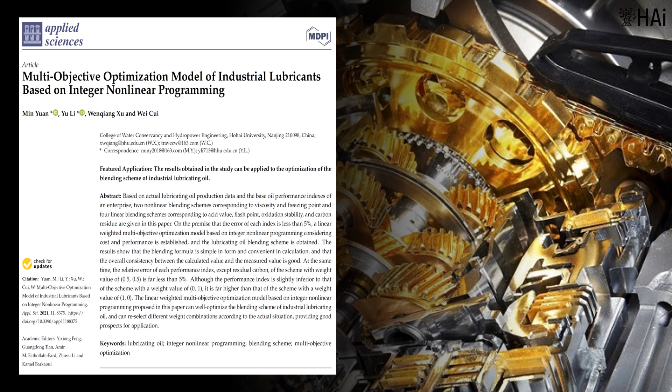Presents the Conference: Oil Lubricant Blend Nonlinear Optimization. The material of the conference was organized by engineer Jesus Velasquez Bermudez, Ph.D. This conference is based on the paper Multi-Objective Optimization Model of Industrial Lubricants based on Integer Nonlinear Programming.

Industrial lubricating oil is a liquid or semi-solid lubricant used in various types of automobiles and mechanical equipment to reduce friction and protect machinery and machined parts. It mainly plays the roles of lubrication, auxiliary cooling, rust prevention, cleaning, sealing, and cushioning.

At present, the demand for lubricating oil shows a trend of specialization and customization. Different mechanical equipment and applications have different requirements for lubricating oil performance, so there is an urgent need for enterprises to produce specific quality lubricating oil according to the actual demand.

Lubricating oil products are prepared by mixing two or more base oils with different properties according to a certain proportion. However, the varieties of base oils refined by oil refining enterprises are limited, so it is necessary to use limited base oils to prepare the required lubricating oils. Therefore, the blending of base oils is the basis for the preparation of lubricating oil products. The most common method of lubricating oil blending is tank blending.

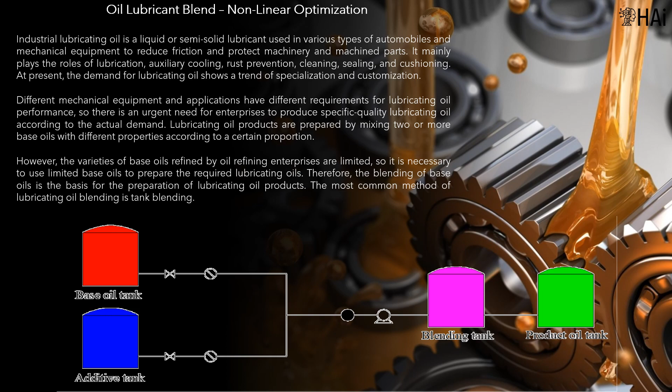The image presents an oil lubricant production plant. The image presents the base oil supply chain. Oil lubricant blend and nonlinear optimization process.

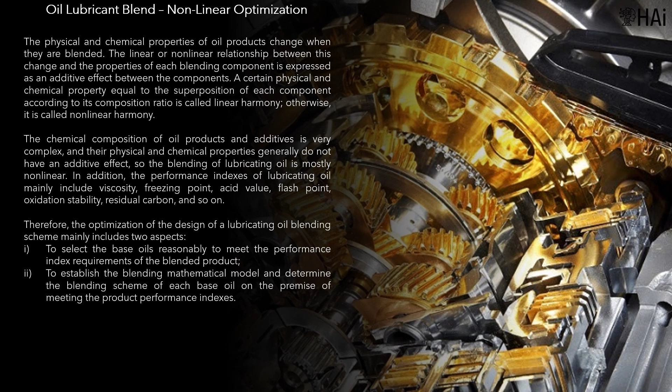The physical and chemical properties of oil products change when they are blended. The linear or nonlinear relationship between this change and the properties of each blending component is expressed as an additive effect between the components. A certain physical and chemical property equal to the superposition of each component according to its composition ratio is called linear harmony, otherwise, it is called nonlinear harmony.

The chemical composition of oil products and additives is very complex, and their physical and chemical properties generally do not have an additive effect, so the blending of lubricating oil is mostly nonlinear.

In addition, the performance indexes of lubricating oil mainly include viscosity, freezing point, acid value, flash point, oxidation stability, residual carbon, and so on. Therefore, the optimization of the design of a lubricating oil blending scheme mainly includes two aspects: to select the base oils reasonably to meet the performance index requirements of the blended product, and to establish the blending mathematical model, and determine the blending scheme of each base oil, on the premise of meeting the product performance indexes.

The blending formula of early lubricating oil was mainly optimized by the linear programming method. However, many important technical indexes of lubricating oil do not show a simple linear relationship with the content of each component. If the oil products are blended according to the linear programming method, the prediction accuracy of the performance of the blended product will be poor, and unable to meet the actual needs of production.

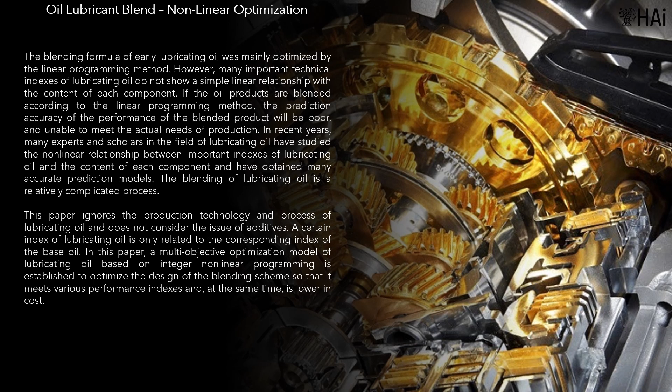In this paper, a multi-objective optimization model of lubricating oil, based on integer nonlinear programming is presented. The proposed modeling process considers two stages: first, data preprocessing, and second, optimization of the blending. The first is based on predictive analytics and the second on prescriptive analytics.

Data preprocessing. To manage nonlinearities and uncertainty in the transformation functions of the mixture of the base oil characteristics and the technical specifications of the lubricant, the following process was followed.

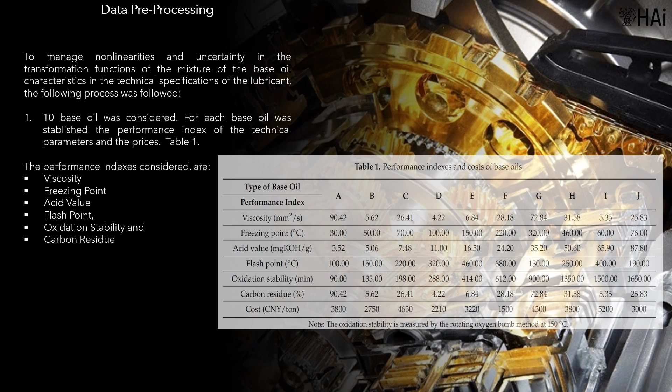10 base oils were considered. The performance indexes considered are viscosity, freezing point, acid value, flash point, oxidation stability, and carbon residue.

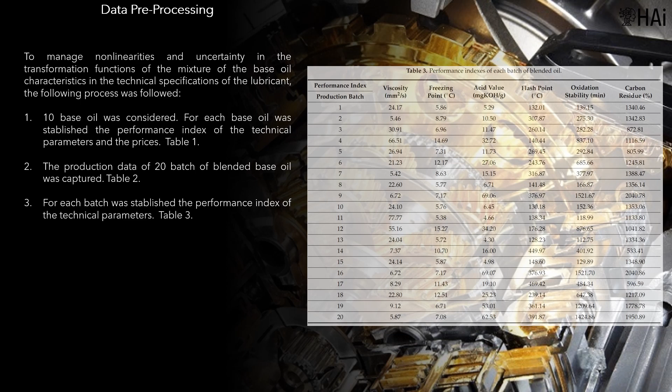The production data of 20 batches of blended base oil was captured. For each batch was established the value of performance index, in the appropriate measurement units. The data was normalized for the 20 batches, to calculate the mass fraction of base oil in each batch of blended oil. The calculation formula is as follows.

The mass fraction matrix of blended oil is equal to the mass of base oil I in batch J of blended oil, divided by the total mass of batch J of blended oil.

The table presents the value of the performance indexes for each of the base oils considered, and unit costs per ton for each base oil.

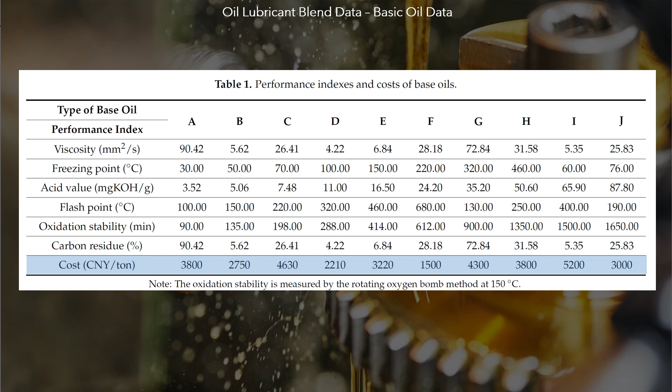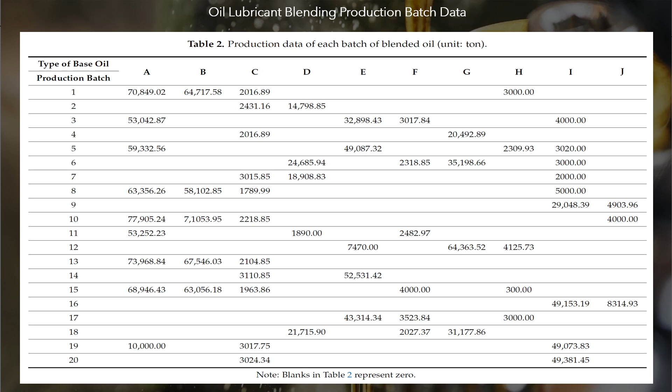The table presents the composition by weight of each base oil in each batch. From this data, the mass fraction matrix is calculated. The table presents the observed index performance for each batch.

All the above data will be used to calibrate the contribution formulas of each base oil in the blend for each performance index. In this paper, the viscosity of each oil batch is calculated using the internationally common viscosity blending calculation formula. For the freezing point, a polynomial formula is proposed. For the other indexes, acid value, flash point, oxidation stability, and carbon residue, the linear blending formula is applied to predict the lubricating oil indexes.

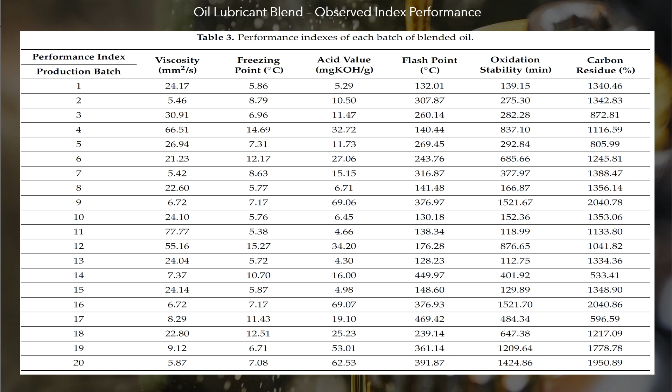The indexes with low prediction accuracy are adjusted non-linearly, and finally the blending scheme uses a complex power polynomial for high-precision prediction. Adjusted data for viscosity.

Viscosity is one of the most important characteristics of lubricating oil and a performance index that should be considered first in lubricating oil blending. In addition, the viscosity of lubricating oil is an important basis for classifying oil brand numbers.

The viscosity calculation formula is established as follows: the logarithm of the observed viscosity is equal to the sum over the base oils of the mass fraction of the oil mixed, multiplied by the logarithm of viscosity of the base oil.

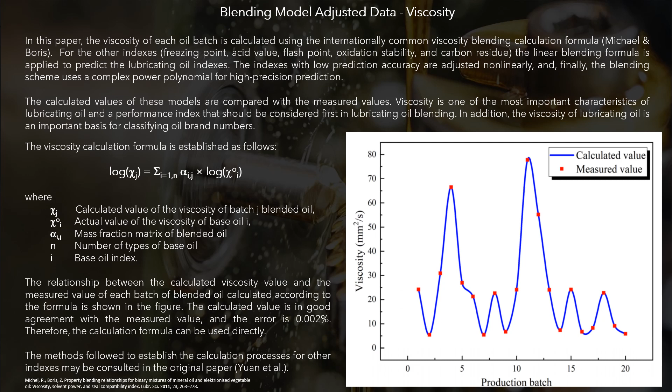The relationship between the calculated viscosity value and the measured value of each batch of blended oil calculated is shown in the figure. The calculated value is in good agreement with the measured value, and the error is 0.002%. Therefore, the calculation formula can be used directly.

Adjusted data for freezing point. The freezing point calculation formula is established as follows.

The calculated freezing point value of batch J of mixed oil is equal to the sum over all base oils of the mass fraction matrix of the mixed oil, multiplied by a polynomial function of the freezing point of the base oil. The polynomial function includes two factors that must be estimated, h and f. It is equal to the freezing point of the base oil raised to the power f, plus h multiplied by the freezing point of the base oil raised to the power 1/3.

Using a nonlinear least squares algorithm, the values of f and h are 0.4754 and minus 0.003, respectively. The calculated value is in good agreement with the measured value, and the average error is 1.546%, so the calculation formula can be used directly.

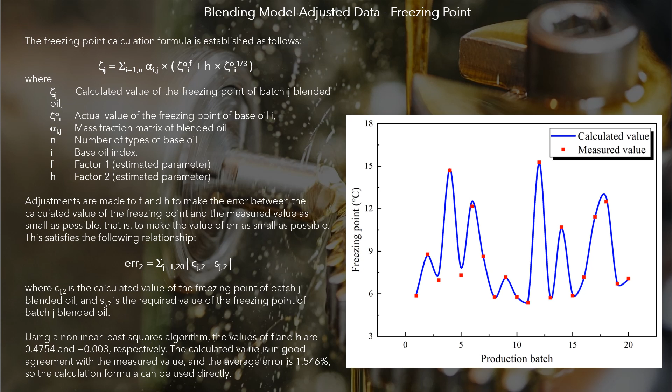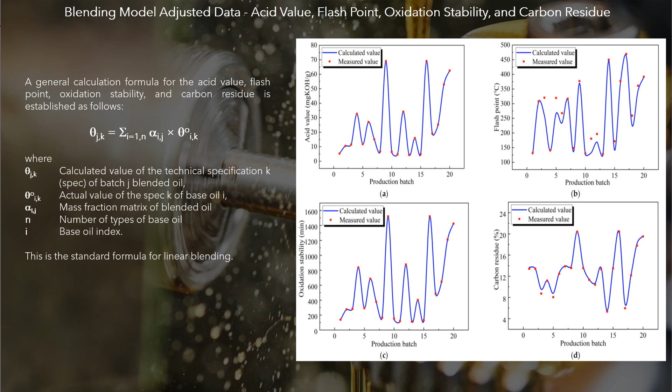Adjusted data for acid value, flash point, oxidation stability, and carbon residue. The standard formula for linear blending is used for a general calculation formula for the acid value, flash point, oxidation stability, and carbon residue. The image shows the curves of the four indices.

Multi-criteria blending optimization model. In the actual production of lubricating oil of specific quality, it is often necessary to consider both cost factors and performance factors.

Based on these, this paper establishes a bi-criterium objective function, composed by two measures of success: economic value, cost of the base oil, and relative error value of the performance indexes.

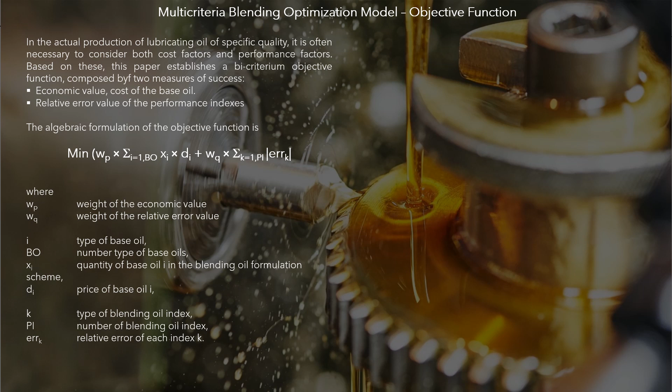The objective function is equal to the weighted sum by the WP factor of the sum of the costs of the base oil, plus the weighted sum by the WQ factor of the sum of the absolute error value of the indexes.

Multi-criteria optimization is a branch of optimization, very studied and widely used to face mathematical problems in which the decision maker has more than one criterion to select the objective function.

In this case, two criteria may be considered: cost of the base oil, and error value of the performance indexes. Normally the criteria move in opposite directions. If we optimize one criterion, the other is de-optimized.

The formulation of the objective based on subjectively weighing the conflicting criteria has a fundamental problem. The solution of the problem depends on the decision maker criteria, which is not desirable.

In this case, it has that for any feasible rational solution, there will be a pair of weights, WP and WQ, that produces such solution, which decreases the benefit of optimization.

On the other hand, if there are subjective variables in the objective function, the solution also depends on the measurement scale of these variables. This implies that if it changes the scale of a variable, in this case K, the solution changes. This is not desirable in an optimization model, as it allows the decision maker to manipulate the solution of the mathematical problem.

The best way, in the opinion of the speaker, is to build Pareto curves of the two criteria, and based on its analysis make the decision.

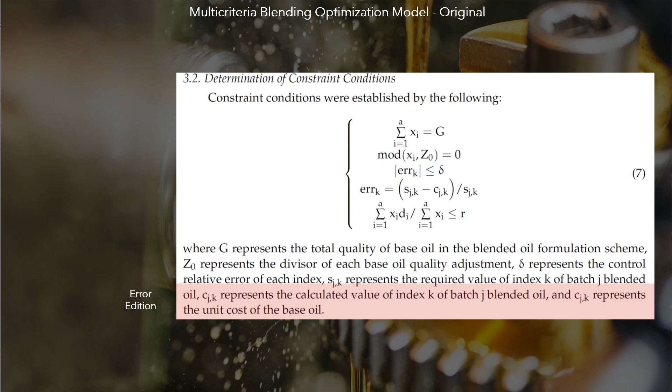Constraint conditions were established as follows. Weight of the mixture, in tons, defines the weight of the mixture to be made. Control of the amount of base oil, in tons, determines that the amount of base oil to be used is a multiple of Z0. Error handling limits the error for each performance index to a maximum value equal to delta.

Calculation of the error based on the control batches determines the error of the index, taking the control batches as reference. Budget control determines that the total unitary cost of the mixture is less than a certain cost R.

The second constraint, the control of the amount of base oil, makes the problem discrete, MIP, mixed integer programming. Viscosity and freezing point constraints make the model nonlinear. The resulting problem is MIN-LP, mixed integer nonlinear programming.

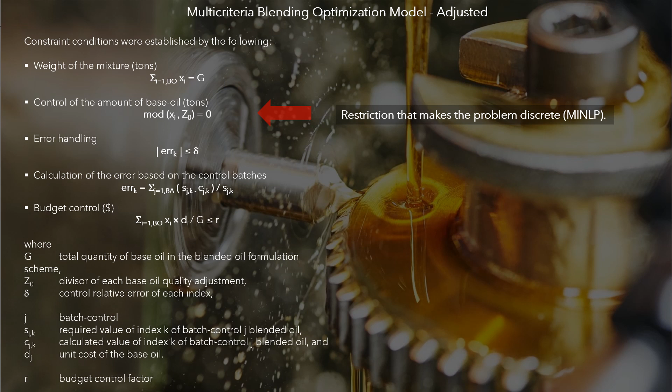Solution and analysis of the nonlinear programming model. A customer requested 80,000 tons of lubricating oil at a cost of no more than 3,500 Chinese yuan per ton, with performance indexes as shown in the table, where the error of each index is no more than 5%.

In the corresponding constraint conditions, the total mass G of the base oil in the blending oil scheme is 80,000. To ensure that the quantity of base oil is adjusted to an integer multiple each time, the value of Z0 is 100. The maximum type value of the base oil in the objective function corresponds to 10, the maximum type of the blending oil index corresponds to 6, and the maximum type of control batch is 20.

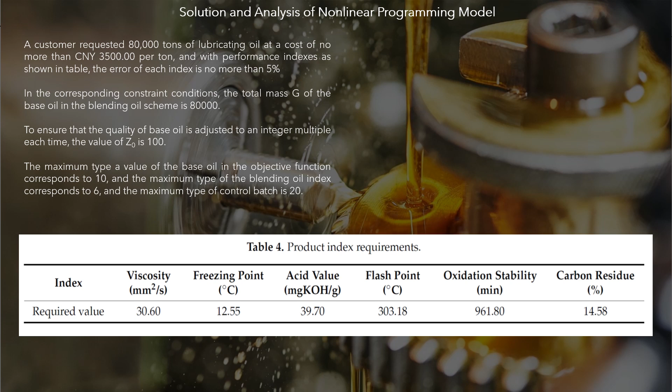The paper presents three blending schemes for different weighting factors of cost and performance. Mathematically, they are characterized by the value of the criteria factors: WP, weight of the economic value, and WQ, weight of the relative error value.

The schemes are: economic value, cost of the base oil, with weights WP equals 1, WQ equals 0; relative error value of the performance indexes, with weights WP equals 0, WQ equals 1; and a mixed scheme with weights WP equals 0.5, WQ equals 0.5.

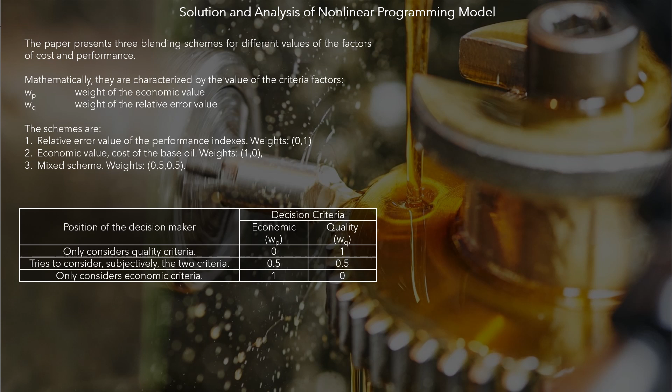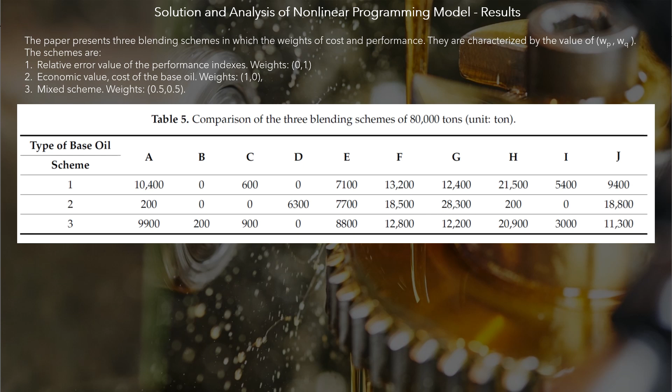The table summarizes the three schemes considered. The blending schemes are shown in Table 5. The composition of the optimal mixture for each of the three optimization schemes is presented in Table 5. The calculated values and required values of each index, and the cost of each blending scheme, are compared in Table 6.

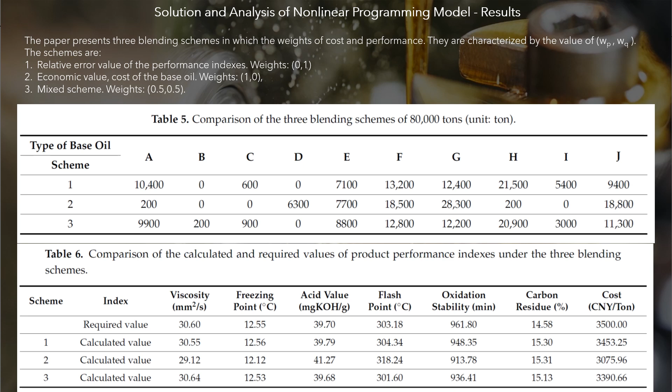According to Table 6, all performance indexes of Scheme 1, the performance error criterion, meet the requirement that the relative error does not exceed 5%. At the same time, the cost is 3,453.25 yuan per ton, which is lower than the 3,500 Chinese yuan per ton required.

All performance indexes of Scheme 2, the economic criterion, meet the requirement that the relative error does not exceed 5%. The cost is 3,075.96 yuan per ton, which is lower than the 3,500 yuan per ton required by the customer, and far lower than the 3,453.25 yuan per ton of Scheme 1.

However, the relative errors of all performance indexes except Index 2 are close to 5%, which is unfavorable to the overall performance of the blended oil.

According to Table 6, the cost required by the customer is less than 3,500 yuan per ton, so all schemes meet this requirement. In this research work, if more attention is paid to the performance index factors, then Scheme 1 is recommended. If the cost factor is more important, then Scheme 2 is recommended. If both cost and performance index factors are considered, then Scheme 3, the mix of economic and index performance, is recommended.

It is important to note that if the units of measurement of the variables, of any type, are changed, the solution of mixed Scheme 3 changes.

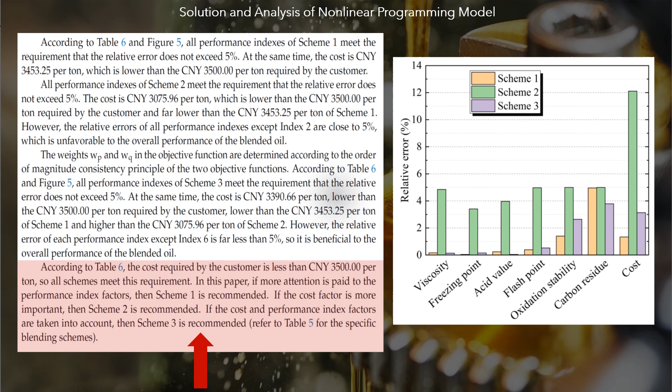Multi-criteria optimization and Pareto optimal decisions. Pareto efficiency, also known as Pareto optimality, is a concept from economics which has applications in engineering and in different social sciences. The term is named after the Italian economist Vilfredo Pareto, who used this concept in his studies on economic efficiency and income distribution.

In the case of multi-criteria optimization, given a criterion assignment, a shift toward a new assignment which improves at least one criterion without making the situation of the others worse is called a Pareto improvement. An assignment is defined as Pareto optimal when no new Pareto improvements can be achieved.

In this case, there are 6 lubricant quality criteria. To facilitate the explanation of the analysis of this case, only 2 criteria will be considered: the viscosity indicator will be criterion 1, and criterion 2 will be the cost. The optimal Pareto points configure the Pareto curve of a multi-criteria problem.

For the case of 2 criteria, the process of constructing a Pareto curve is as follows. First, solve the problem optimizing only criterion 1. Second, solve the problem optimizing only criterion 2. The values of the objective function for the above cases define the extreme points of the curve.

Subsequently, the problem is modified by including as a constraint a bound for criterion 2, and criterion 1 is optimized. The bound will be higher if the best thing for criterion 2 is to maximize it, and lower otherwise.

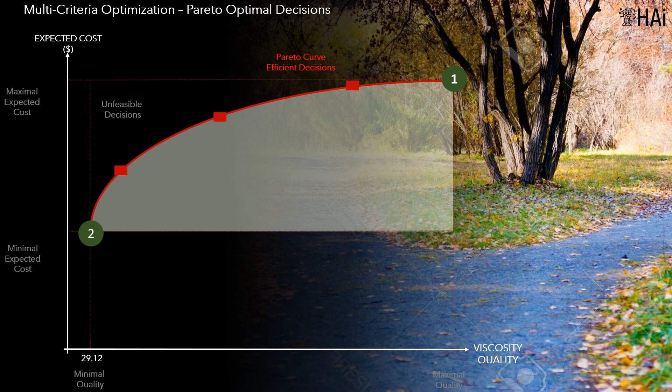In the case of reference, the extreme points of the Pareto curve are point 1, 3,500 to 30.64, and point 2, 3,075 to 29.12. Between point 1 and point 2, there are infinite numbers of curves that can join them.

To know the proper shape of the curve, experiments must be performed to obtain curve points between the two extreme points. In the case of this study, an experiment is carried out with the factors WP equals 0.5, WQ equals 0.5. These factors are arbitrarily selected, with the idea of generating information about the shape of the curve.

But in this case, scheme 2 produces an unexpected result: a better solution for the viscosity index. This implies that the maximum obtained by scheme 1 is not the optimum value. This can be explained by the nonlinear nature of the problem, which, being non-convex, requires a global optimizer.

In this case, the technology used was Lingo's Generalized Reduced Gradient (GRG) algorithm, which is oriented to convex nonlinear programming, without considering the discrete constraint, which turns the problem into a MINLP. Then, the optimal Pareto curve is not coherent.

The lecturer prefers the method described above for constructing the curve, using multiple experiments between the extreme points of the curve. Implementation of the mathematical model.

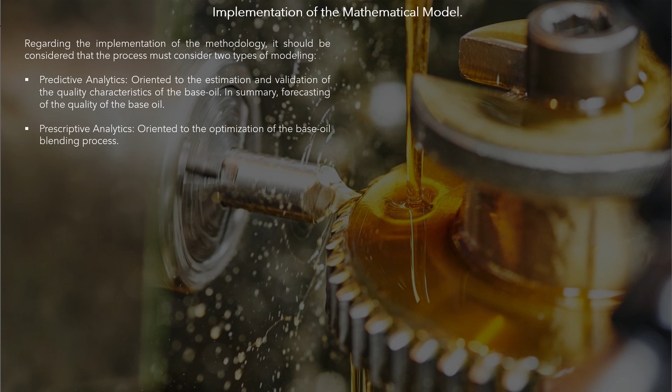The implementation of models based on predictive analytics involves the selection of one of the following methodologies. Data-based methods try to identify the parameters based only on the data, without considering the equations of the physical process. The most known methods are artificial neural networks (ANN), support vector regression (SVR), and advanced probabilistic methods (APM).

Model-based methods try to identify the parameters based only on the equations of the physical process, without considering the characteristics of volatility of the data. This includes physical processes based on differential or algebraic equations, and parameter estimation based on ANN, SVR, or APM.

Hybrid methods are dynamic methods that combine multiple data sources, the sample volatility, and the certainty about knowledge of the physical process or its modeling. The most known and used method is state estimation, mainly the Kalman filter.

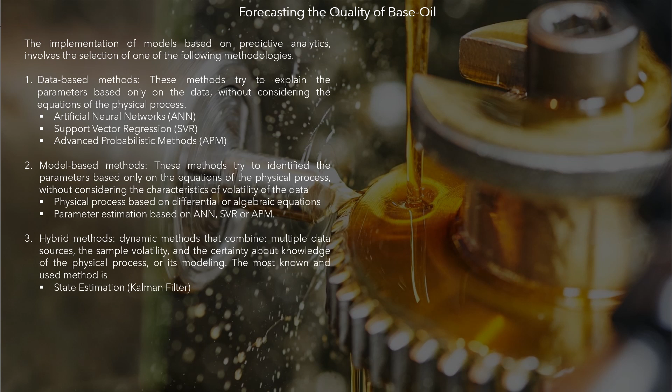Regarding data processing, it must be considered that base oil must be acquired or produced in batches. During its lifetime, two stages should be considered: the time of its arrival or beginning, to be used in production, and the use of base oil in the production of multiple batches of different lubricants.

From the point of view of the parameter estimators of the predictive model, two stages related to the previous ones must also be considered: initial estimators and re-estimation of estimators.

The ideal is to test the base oil in the production of multiple test batches, and from there make the appropriate initial estimators, before formal production. If this is not possible, for whatever reason, the solution may be to establish an additional model to estimate the initial estimators from the existing information for other base oils.

During the second stage, multiple batches of lubricants produce data to verify that the initial assumptions over the base oil are appropriate. An alternative model is proposed based on a formulation that minimizes production costs and guarantees lubricant quality restrictions. The model includes all the typical constraints of a blending model.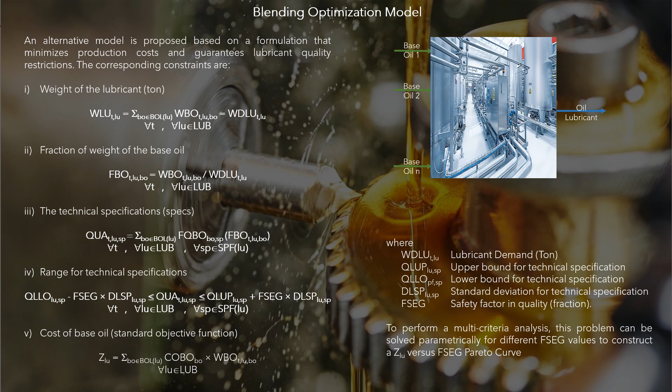It should be considered that, to account for nonlinearities due to viscosity and freezing point, the FQBO function is used, and the factor f-seg, the safety factor in quality, a fraction, is introduced. To perform a multi-criteria analysis, this problem can be solved parametrically for different safety factor values, to construct a cost versus f-seg Pareto curve.

The previous mathematical model can be extended to become a useful model at the level of real cases. Among many, the following constraints can be considered: time windows to meet lubricant demand, additives must be included to improve or stabilize quality conditions, multiple types of lubricants are produced simultaneously, multiple types of base oil may be used, and scheduling to receive the base oils, which may be in ports or in terminals of the pipelines.

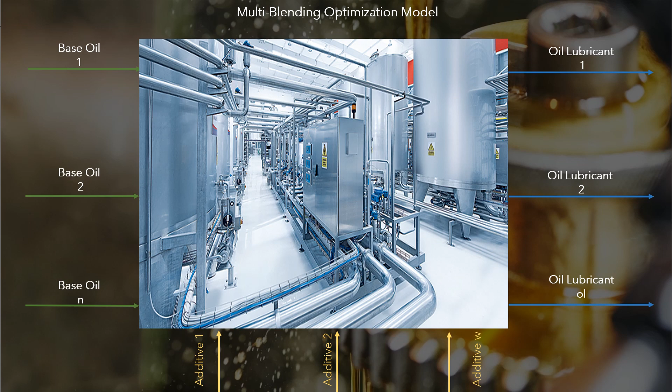The model may include restrictions on facilities, for example tanks, and include time, to convert it into a dynamic model.